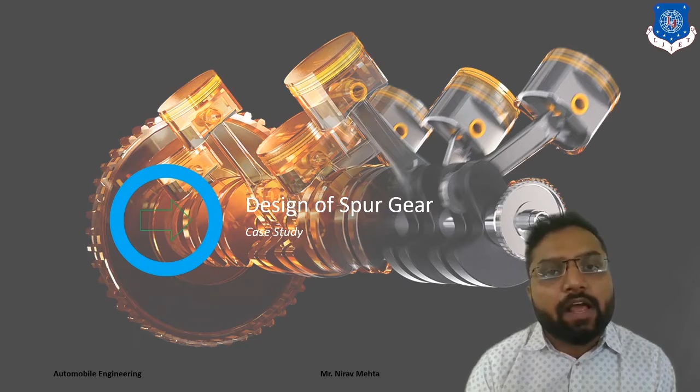So let's move on to this case study. Here we are given RPM of this bronze spur gear, the pinion, which is 600 RPM. It drives a cast iron spur gear at a transmission ratio of 4:1. So a bronze pinion is driving a cast iron gear with a velocity ratio of 4:1. So RPM of our pinion is 600 and RPM of the gear will be 600 divided by 4.

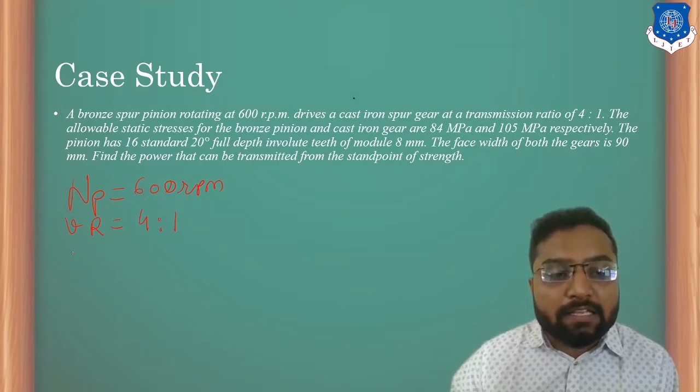The allowable static stress for bronze pinion and cast iron gear are 84 megapascal and 105 megapascal. So we are given two limiting stresses: for pinion 84 megapascal and for gear 105 megapascal respectively. The pinion has 16 teeth, so TP is 16. We have a system of gear with a 20 degree angle, which will help us to find out our tooth form factor Y.

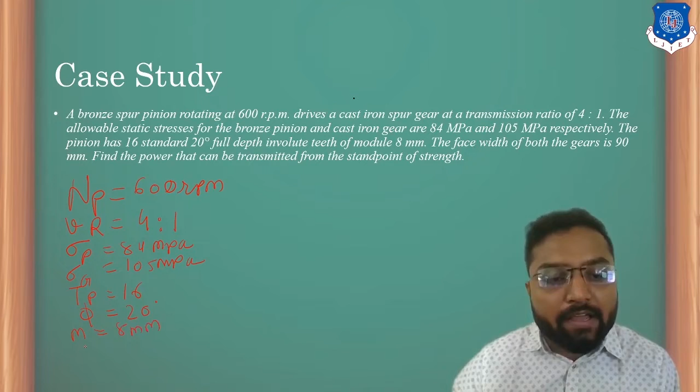Module given here is 8 mm and face width of both gears is 90 mm. We have to find out the power that can be transmitted from the standpoint of strength. Before getting into this, we have to find the relationship between this power and our thrust load, WT. In the case of spur gear, it is defined by sigma 0 into CV, the velocity factor, into pi into B, the face width, into module, into tooth form factor Y. This tooth form factor depends on the 20-degree full depth involute tooth.

Here our value of sigma 0 is either 84 or 105. I will tell you how you are going to decide this value for both of them. CV depends on linear velocity of gear or pinion. This linear velocity is V equals pi d n by 60, where d could be dp or dg. But velocity for both pinion and gear will be the same, so you can take either pinion or gear.

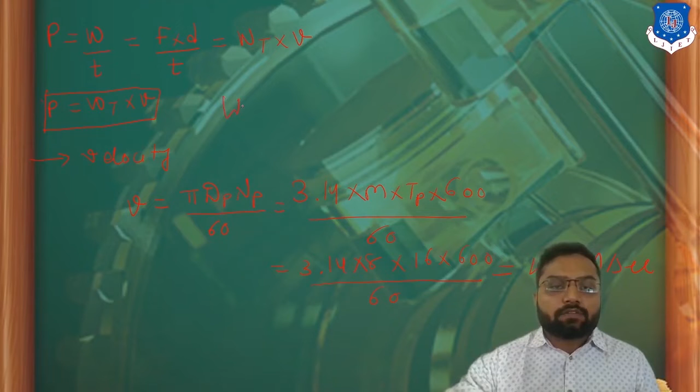Let's put these values: 3.14 into module 8 into 16 into 600 divided by 60. The solution of this is 4.02 meters per second. So we have velocity. Let's write it down here: velocity is 4.02 meters per second.

Now let's find out the second step. It is Wt, or you can say thrust load. I hope you understand this point very well. Let's move on to Wt. Wt is nothing but sigma 0 into Cv into pi into b into m into y, where sigma 0 could be either the allowable stress for a pinion or the allowable stress for a gear.

So how are you going to determine this sigma 0, whether it is pinion or gear? When the gear and pinion come into contact with each other, they do not deform at the same time. Either pinion or gear deforms depending on its strength. To find out which will fail first, we have to satisfy this criterion using the multiplication of the tooth form factor and allowable stress: yp and sigma p for the pinion, and yg and sigma g for the gear. Whichever of these values is lesser, we design the pinion or gear depending on that value.

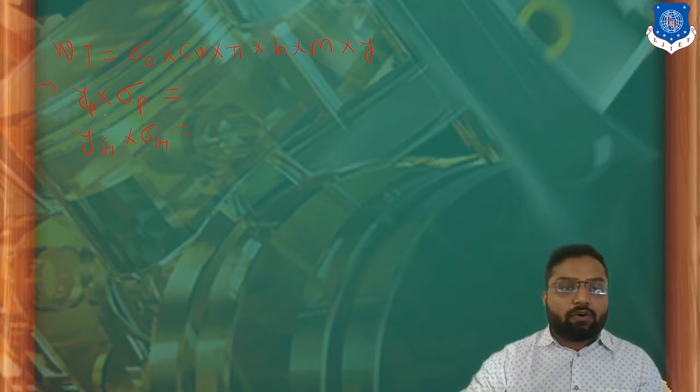If the product of yp and sigma p is smaller compared to the product of yg and sigma g, then we have to design for pinion. And if the product of yg and sigma g, which is for gear, is smaller, then we have to design for gear. So let's find out what we have to design for. First of all, we have to find out yp and yg. So first, what is yp? To find out yp, we should know what y is.

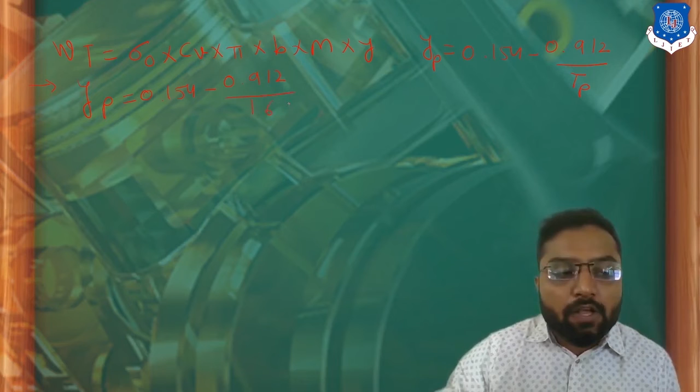For this 20 degree stub gear angle, we have the value of Y is 0.154 minus 0.912 divided by T. In the case of YP, it is TP. So here, 0.154 minus 0.912 divided by 16. So this value is going to be 0.097. Now, for a gear, it is YG.

So same value, but the number of teeth is going to change. So in place of TP, it is going to be TG. So 0.154 minus 0.912 divided by TG. Now TG is in terms of velocity ratio into TP. So value of TG will be velocity ratio, which is 4, into TP, which is 16. So ultimately it is 0.14.

To find out whether we have to design it for gear or pinion, we have to find the product of sigma P into YP, which is 84 into 0.097. Value of this will be 8.14, and for a gear it is sigma G into YG, which is 105 into 0.14, and value of it is 14.7. So here you can clearly see the product of limiting stress and tooth form factor of the gear is higher compared to the pinion. So we have to design this gear for the pinion.

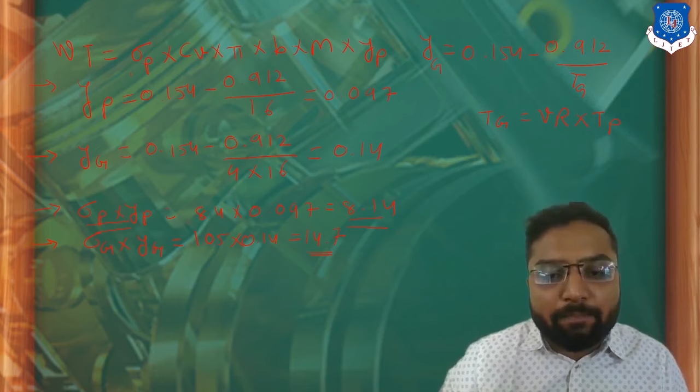Okay, so let's move on to determining WT. Now we have found out what sigma is. WT is sigma P into CV into pi into module m into b into YP. So we have to find CV. We have that CV, which is 0.427. So let's put those values. Sigma P is 84. Here I'm taking all the values in megapascal, so all the values are going to be in mm.

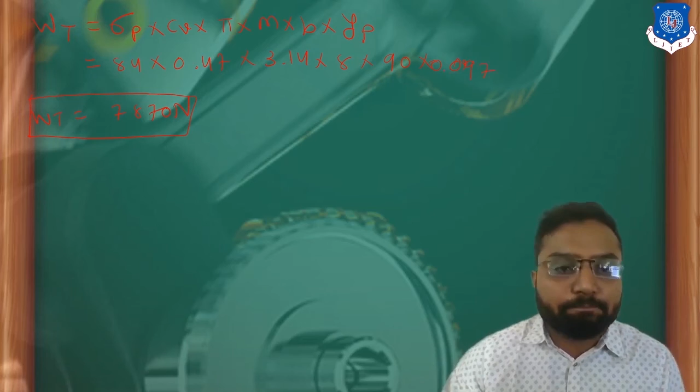0.427 into 3.14 into 8 into 90. I'm taking each and every value in terms of mm, and this is 0.097. So this WT is going to be 7870 newtons after multiplying with this equation. Okay? So now depending on this, we have to find out power.

P is equal to WT into velocity V. So WT is 7870 newtons into velocity which we have found, 4.02 meter per second. So ultimately our power will be 31,640 watt, which is 31.64 kilowatt. So the power this gear can transmit is 31.64 kilowatt. I hope you got each and every aspect of this case study. If you have any doubt, you can directly ask me.

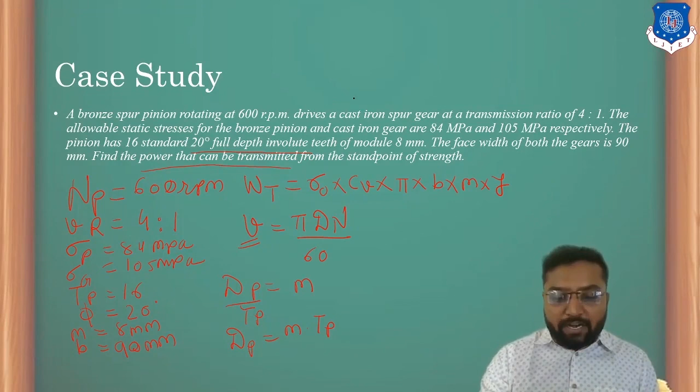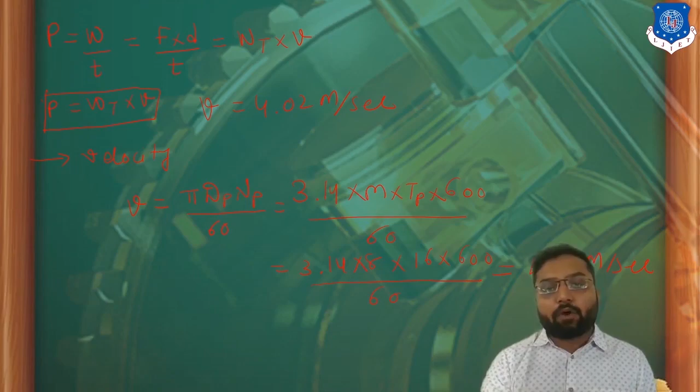Let's recap what we have learned today. We started this design consideration from a case study where we were given input data and asked to find power, which depends on tangential load and velocity. So we established the relationship P is equal to WT into velocity. First we found velocity, which is pi DP NP upon 60. After finding this velocity, we found the power. I hope you understand this very well.